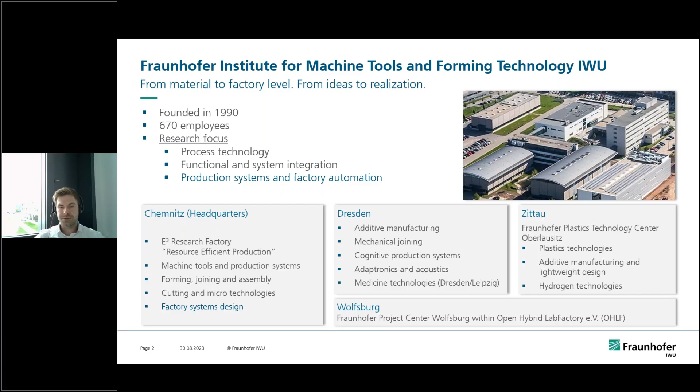So what I want really to make clear is that we are looking at the topic not from a mere software developer perspective, but from a perspective of the end users of small and medium-sized enterprises, of factory planners in general. And of course, we are related to the research focus and area of production systems and factory automation. And our goal is to provide efficient production planning and factory planning solutions, and also the appropriate design of energy supply and energy usage in production. So this is quite important to know in differentiation from software developers and other actors.

Just as a quick motivation, unfortunately, this is a picture in German, but I will highlight and translate the most relevant aspects. There are, of course, many investigations going on how to use different energy storages depending on different sizes and the general area. What you see right here is an investigation of the colleagues down below. They investigated the current capacity until 2019 for home storage systems, for industrial storages and large-scale systems. And of course, you see quite a small share of the industrial part.

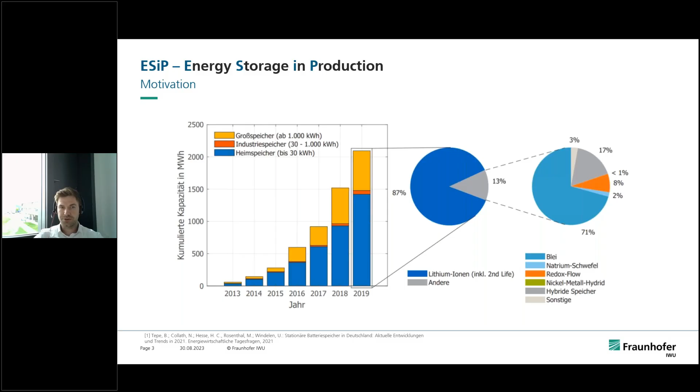And this, of course, is one aspect of what we are addressing with the project, because we want to make sure that the design and usage of such battery systems and storage systems is way easier for industry, because the industry is quite a flexible environment compared to, let's say, home storage systems. We do have many more and larger load peaks. So the question is, why do we not take advantage of storage systems in general, and what are the current challenges to overcome?

So in general, just to provide a quick structurization and to give you some overall insight into the benefits of storage systems, we elaborated the main areas and scenarios for energy storage systems in production. I think one of the aspects that is the most well known is reducing peak loads during production times when several ovens, for example, are heated at the same time. This typically increases the energy demand or raises some peaks. So we want to use the storage systems for reducing them.

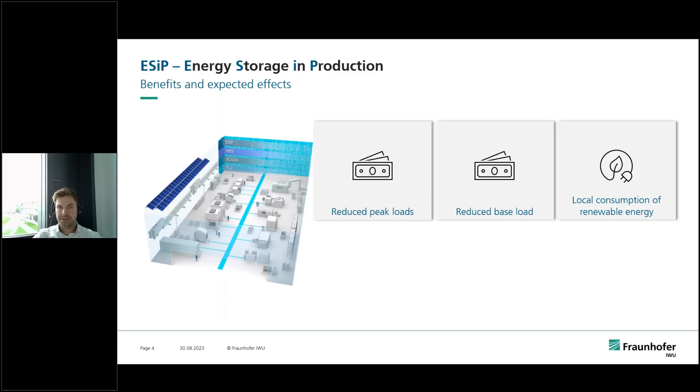Of course, when integrating storage systems very near to machines or into machines and plants, we can also reduce the base load from a whole factory or systems perspective, because we can use them for regenerating energy during several production cycles. Another point, of course, that is quite intuitive is the integration together with local energy sources like photovoltaic plants. So in that case, battery storages or energy storages in general help to make use of the generated energy when

it is really needed. So this, of course, then leads to further aspects, which is that we want to generate or build up and design a system that is suitably dimensioned, so in an appropriate way for the demand or the forecasted demand of our energy consumption that we see for the next year, next years, and the time to come.

Of course, we do now have many initiatives and also obligations to build up really intelligent energy grids, which require more control of the different energy sources and energy sinks. And in that case, we need battery or storage systems that can be integrated in an intelligent way.

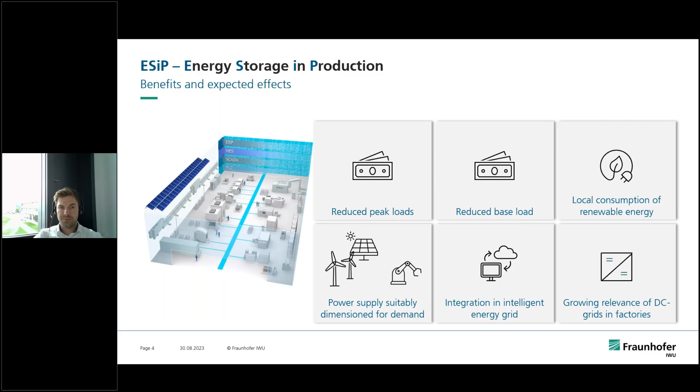And last but not least, there is a growing relevance of DC grids, so really a DC-based infrastructure in factories, which hopefully helps to reduce energy demand in general, but also reduces systems complexity and material demand for electrical power supply. So based on these benefits and expected benefits, we came up with the idea to provide the appropriate tool for designing and controlling energy storages in production.

So the main question is, what is actually the overall need for research? And we found out, also in discussion with end users, with manufacturing enterprises, but also with planning companies, that there is on one hand no easy to use design tool, which means that currently a lot of the infrastructure is designed based on experience, based on very rough values, some estimated values with some spreadsheet calculations.

So the integration of simulation and dynamic observation is more or less something that only experts can deal with, and the easy to use and easy design of such infrastructure is currently quite hard or not available. And besides that, there is not that much standardization for integrating what we call decentralized energy storages or distribution grids. That means integrating battery storage on the appropriate levels throughout a factory or several factories.

So the overall goals of the project are first and foremost to design a tool, which is a design tool for energy storage systems that considers different technologies and can be implemented on several levels. The second one is, and it's directly connected to the first point, that we want to implement algorithms for the operational management and for coupling different energy and power storage systems.

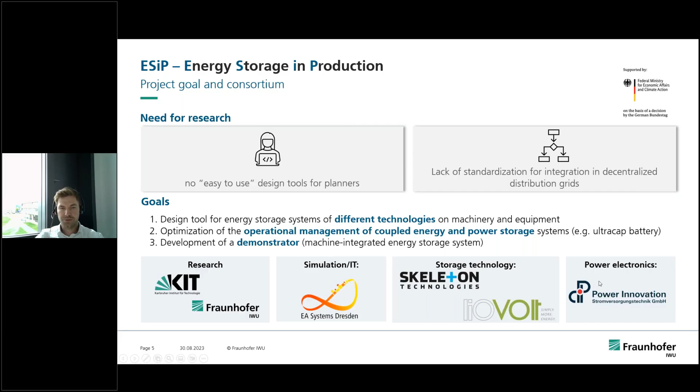Down below you see the project partners. Of course, there are two research partners. We do have one partner that is responsible for implementing the simulation algorithms and developing the interface. Of course, we do have storage technology providers, and it is quite clear that we also need someone with competence in power electronics. So this is the overall consortium,

and I would like to focus on, let's say, the two main use cases we deal with, which is on one hand integrating battery or energy storages on a factory-wide or factory distribution level. In that case, we deal with the aspects of peak shaving and time-shifted usage of the self-produced energy. We hope that with an appropriately designed battery or storage system we reduce the factory grid.

So we reduce over-dimensioning of the energy supply. And of course, in the long-term future, we would provide the appropriate infrastructure to take part in some active energy trading and improvements for power quality throughout the factory. Currently, this is focusing on, let's say, AC grid infrastructure, but in future, this could also be beneficial for the DC integration.

Compared to this, we also deal with a second use case, which is quite near or directly connected to one machine. In that case, we are sure that we may increase the energy efficiency of production machines by providing the option to recover braking energy. So this allows us to integrate machines with a smaller grid connection. And besides that, it is also relevant for providing uninterruptible power supply.

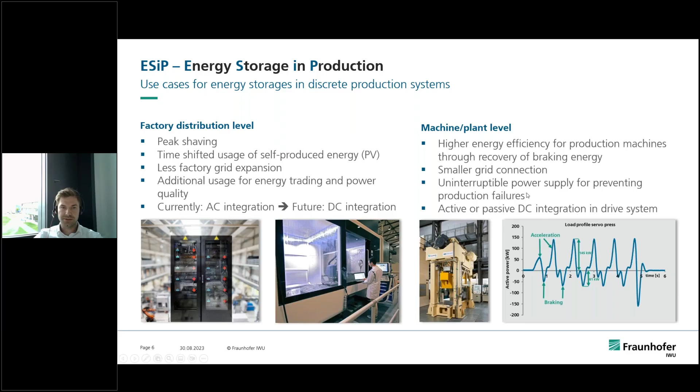So to go a bit more into the components of the software system, in the end there will be a web-based user framework, so it is quite accessible, independent from very hard software or systems requirements, mainly browser-based, accessible by the end users. And of course, we need some input data, which is composed of load profiles, environmental conditions, for example the surrounding temperatures next to the machines and plants, and production parameters and costs.

And then we make use of different models that were already previously developed, but are still developed in the project, where we consider physical models, but also data-based models for the machine tools, the energy storage, and the power electronics. And this is then transferred into an overall calculation based on the well-established FMI standard. Besides the simulation, there is some parameter variation and optimization, to configure the most efficient storage system based on different technologies like lithium-ion, like flywheel, and so on, and to provide the best storage system from an economic point of view.

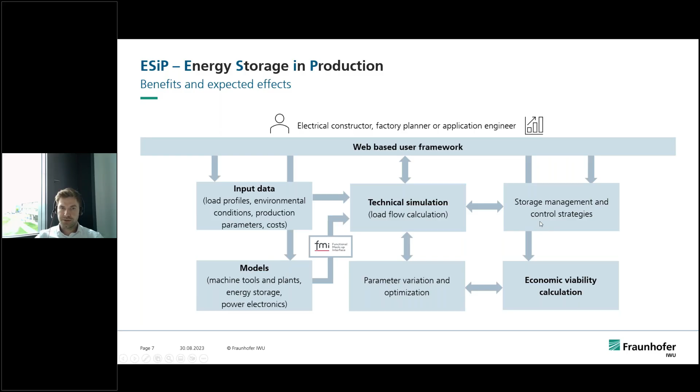And this is also something we are totally aware of. Quite often, as researchers, you may just focus on the technological application and whether it is feasible from a technological point of view. But in order to provide a tool that is really relevant for industry and from a business point of view, we do all the parameter variation and optimization finally based on economic calculation. And as I mentioned, it is not just related to the dimensioning and design of the storage system. It also subsequently integrates management and control strategies for the system that needs to be implemented.

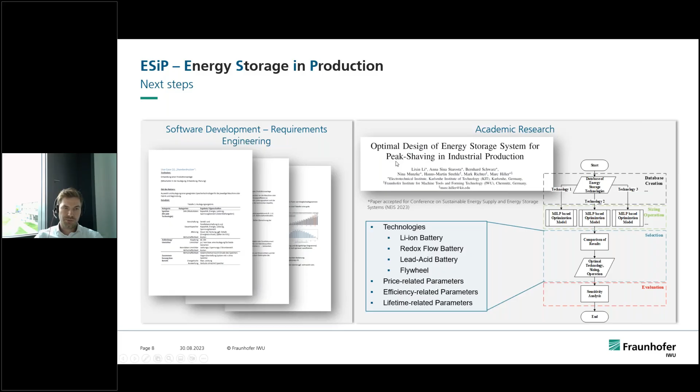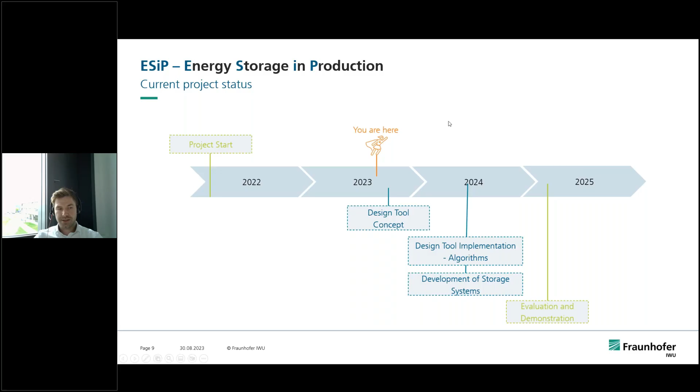So yeah, actually that's it from a quick insight into the ESiP project.